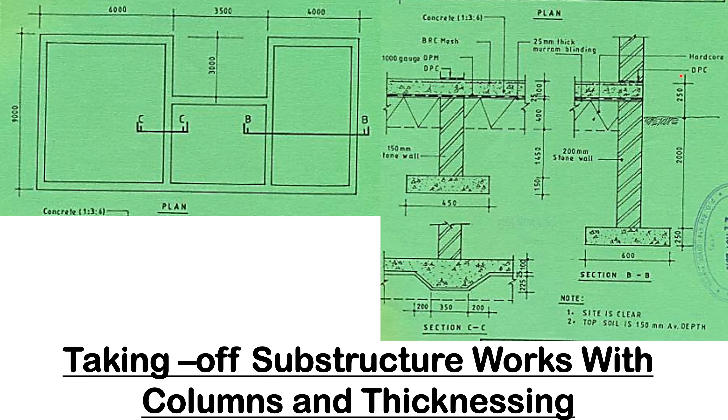So now we shall begin the take off, whereby we shall start with excavating the oversite. Then we shall go to excavating the foundation trenches. We shall lay the concrete in the foundations. We shall go to foundation walling. Then we shall go to hardcore, and here we shall remember that we have the thicknessing. We shall do the murram blinding. Then we have the DPM and anti-termite treatment. Then the formwork and the floor bed.

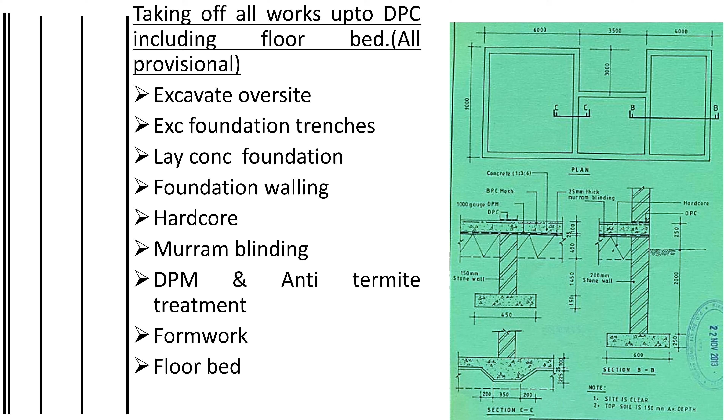So we shall begin with excavating the 150 millimeters depth of topsoil. Remember, you are told that the topsoil is 150 millimeters depth. So excavate away 150 millimeters. We need to measure this site. When we are measuring for site clearance, remember we have to add the foundation spread. The foundation spread is this spread this side.

So if this one was 600, we shall deduct for the wall, which is 200, then it remains with 400. 400 divided by 2, you get 200. So from here to here, we shall add 200 all around the site. That one is for the foundation spread, so that we can add it to site clearance.

So we shall come and analyze the length and the width. The length is 6,000 plus 3,500 plus 4,000, which is 13,500, and the width is 9,000. So if the width is 9,000, we shall add 400. So 9,000 plus 400 shall be 9,400.

Then it is the length and the width, so it shall be 13.9 and 9.4. Then we need to know the level to which we shall reduce. We reduce the level up to where we start to lay the hardcore. So what is the depth from the ground level? How do we calculate that? We shall take the trench, the depth of the trench.

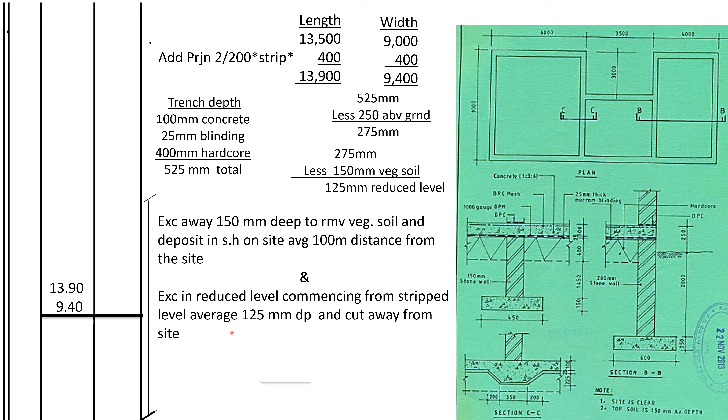Then we have already cleared the site of vegetable soil, which is 150 millimeters. So the remaining amount by which we need to reduce the level is 125 millimeters. So we shall say excavate to reduced level commencing from strip level, average 125 millimeters deep, and cart away from the site. Alright, then we shall go to site.

Remember here we have a void. This one we need to deduct. We have taken this length and width for site clearance. Now we need to deduct for the void. For the void, we shall take this 3,500. Remember, there is a spread coming this way and another spread coming this way from this wall. It spreads this way 200 and this way 200. 200 plus 200 is 400. 3,500 minus 400 is 3,100.

So the length will be 3.1. The width, you can see from outside the wall to outside the wall is 3,000. Assuming the spread will come 200 more, if it comes 200 more, it also needs to go 200 more. So 3,000 minus 200 plus 200 remains just 3,000. So 3.1 and 3, deduct ditto the last two items on void. Alright.

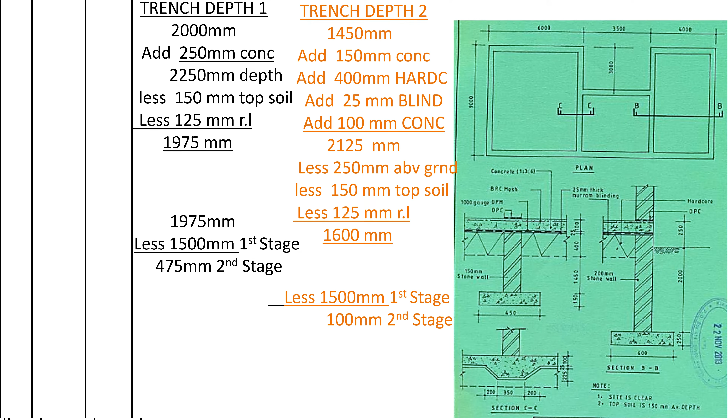Now we shall go to excavating the foundation trenches. We need to book it. We have already found the depth. Now we need the center length. For trench 1, the external trench, we will take the total length. We add 200 and 200 for the spread. It is 13,900 because it was 13,500 plus 400, 200 on both sides. Then the width is 9,000; we add 200 and 200, 9,400. The total perimeter is 46,600.

We also need to add this wall. Remember we did the center line for the recess at the center. The link is on your screen. If you did not watch that video, you can go and watch it so that you know how to calculate the center line for a rectangle with a recess at the center. So we shall add 3,000 times 2, 6,000.

After getting the total external perimeter, we deduct the number of corners times the thickness of the wall. The number of corners is the number of external corners minus the number of internal corners, as we discussed in the previous video. So there are 6 external corners, deduct 2 corners. So 4 corners times the thickness of the trench, 600, is 2,400. So the total center line is 50,200. We book 50.2.

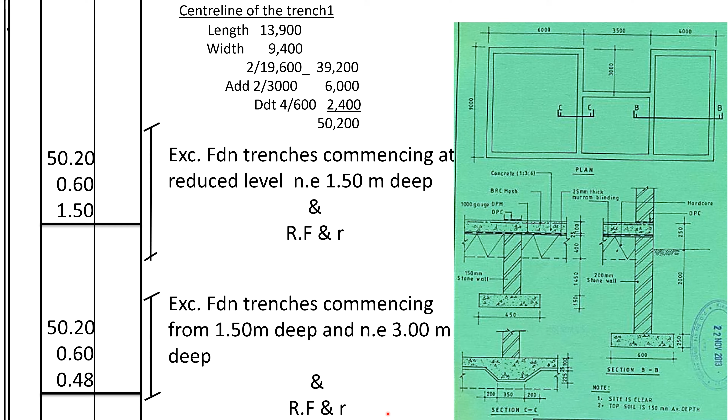The width of the trench is 0.6 and the depth 1.5 for the first stage. Then the second stage: 50.2, 0.6, 0.48. The description is excavate foundation trenches commencing at reduced level not exceeding 1.5 meters deep and refill and ram. The next stage is excavate foundation trenches commencing from 1.5 meters deep and not exceeding 3 meters deep and refill and ram. This volume of soil you add to refill and ram. We need to do a video on refill and ram together with cart away to explain the difference.

Alright, center line for trench 2, this trench here. What is its length? We take the total length here, 9,000, and deduct 3,000 up to here. We remain with 6,000. When we excavate this trench, we have the spread on this side, 200, and this side, 200. But 6,000 is from outside the wall to outside the wall. So we deduct wall and spread, 400, and wall and spread, another 400. 400 times 2 is 800. The difference is 5,200.

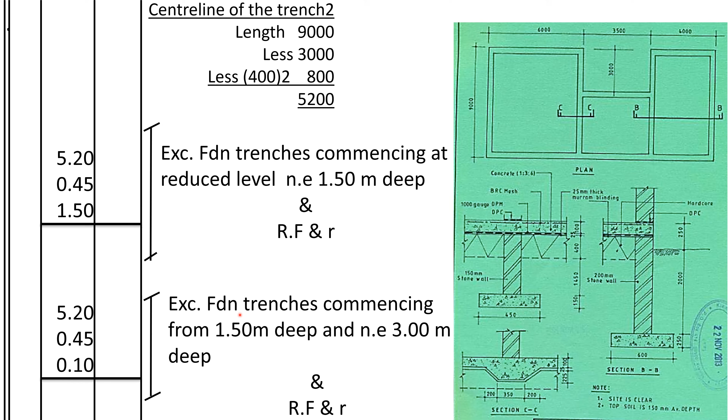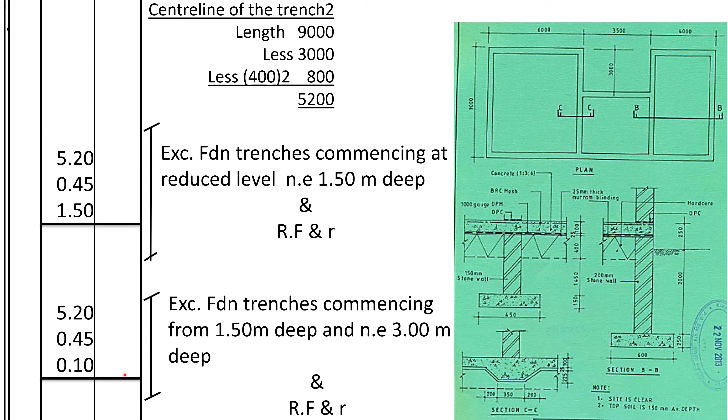So excavating the trench, it shall be 5.2 times the trench thickness of 0.45, as you can see here. Then the depth of the first stage is 1.5. Excavate foundation trenches commencing at reduced level not exceeding 1.5 meters deep and refill and ram. That volume of soil you add to refill and ram. The next stage is excavate foundation trenches commencing from 1.5 meters deep and not exceeding 3 meters deep. You take the center line, the width of the trench, and the depth for that stage, and add to refill and ram.

Alright, so we go to planking and strutting the excavation trenches. We need to support them. This one we usually write item together with keeping the trenches free of water. We write item because in the BQ we shall allocate a provisional sum which can change when we get to site. So we need to go to site, and so we take off as item.

Now we are on mass concrete. This mass concrete here and mass concrete here. How do we take it off? We shall take the center line of the trench multiplied by the width of the trench and the thickness of this concrete. For the external trench, we say mass concrete ratio 1:3:6 in foundation trench for external wall, and this volume of concrete has replaced the soil. So we shall deduct from RFR and add to cart away, the soil that will be taken away from the site.

Then this concrete for the internal wall: the length of the wall is 5.2, the width of the trench is 0.45, and the depth of this concrete is 0.15. So mass concrete ratio 1:3:6 in foundation trench for inner wall, and that volume of concrete deduct from RFR and add to cart away.

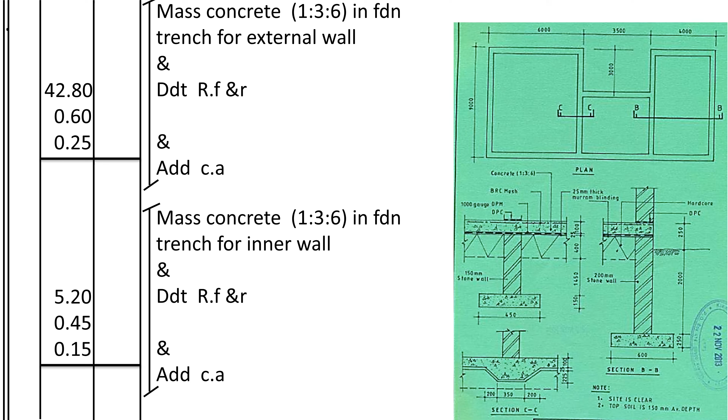Then we go to measuring the height of foundation wall. We shall start with this external wall. The total here is 2000. Alright, 2000 together with 250 above the ground. From here up to here is 2250. Then if we deduct the oversite concrete and the blinding, we shall remain with the foundation wall. So 2250, we deduct 100 for the concrete and 25 for the blinding. We remain with 2125.

So the center line of the trench, which was 42, will be the center line for the wall, because if this trench is 600 and the wall is 200, 600 minus 200 is 400. If we divide by 2, we get 200, 200, meaning the center of the wall is the center of the trench. What about this one? 450 minus 150 is 300. If we divide by 2, 150, meaning the center line for the wall is the center line for this trench. So we shall still take the center line for the trench, then multiply by the height of the wall, 2.13; that is 200 millimeters thick stone external walling in cement sand, ratio 1:3 mortar joints.

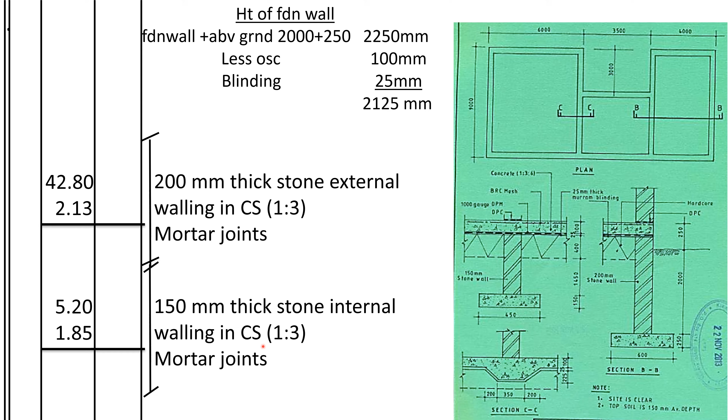Then for this internal wall here, it shall be the length of the wall, which is 5.2. Then the height of the wall, we shall just take 1450 plus 400, 1.85; 150 millimeters thick stone internal walling in cement sand, ratio 1:3 mortar joints.

Alright, so then we shall go to the height of foundation wall. How do we calculate the height of that wall? If we get the height of these walls, just as we have done previously, we can know the volume of soil we need to deduct from refill and ram and add to cart away, because that volume of soil has already been replaced by the wall. So we shall find the volume of the walls. We take the center line of the trench, which is the center line of the wall, multiply by the thickness of the wall, 0.2, then the depth of the wall for the external wall. Then we take this volume and deduct it from RFR and add to cart away.

RFR is the soil that we shall use to refill and ram. You remember we have two heaps, one for RFR, another for cart away. So that soil, we deduct it from RFR because it has been replaced by the wall, and add it to cart away. Then for the internal wall, we take the length of the wall, the thickness of the wall, and the depth of the wall. That volume replaced by the wall, we deduct ditto for internal wall. We do as above. We deduct from RFR and add to cart away.

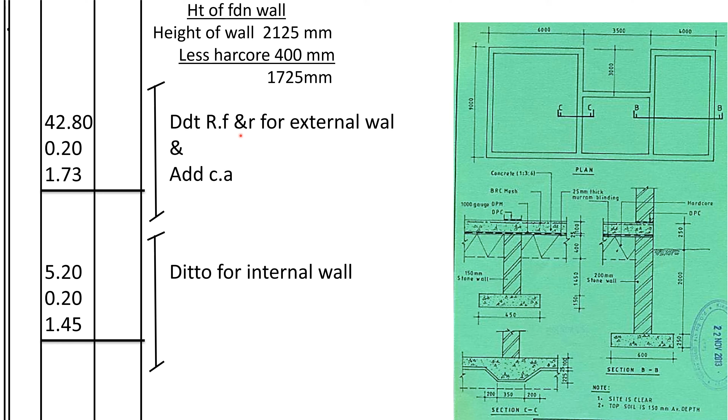Now we shall take off the hardcore. If you can see on the diagram, between the external walls there is hardcore. Hardcore is always placed inside the rooms where there are no walls. Inside the rooms is where we do the hardcore. So there are three ways that you can do the hardcore.

You can take the length and the width of this rectangle, take the length and width of this rectangle, and also take the length and width of this rectangle, then add the thickening, which can bring you so many errors. So the easiest way to do this, we shall take the total area inside the external walls, then we shall deduct the area for the void together with the walls, then we shall deduct the place with the thickening.

If you note well, in the thickening part we reduce the hardcore, then we increase the concrete. I hope that is very clear. So here in the hardcore, you know hardcore could be up to here, but now it was reduced. Then we increase the concrete. So that is the tricky part about thickening.

So when you are finding the area for the hardcore, we shall take the internal dimensions. For the length, we said that the external is 6,000 plus 3,500 plus 4,000. So the total is 13,500. We deduct 400 for this wall and this wall. So it shall be 13.10. Alright, the total external width is 9,000. We deduct this wall and this wall, we get 8.6.

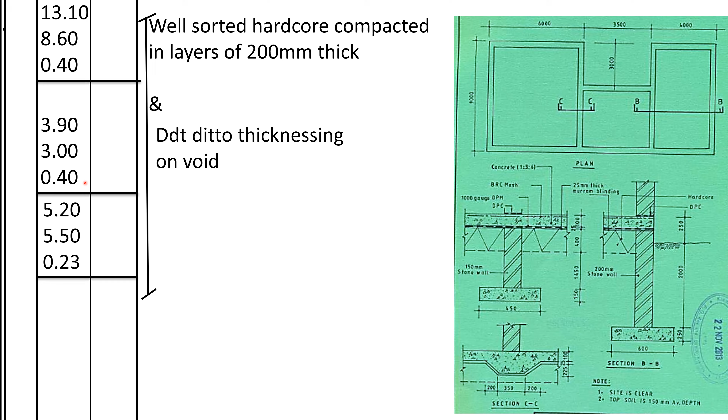Then the width we have here, the internal, is from here to here. So here we have 200 plus 3,000 minus 200, because we were taking the internal dimensions, so it shall remain 3 meters. Then the depth of the hardcore is 0.4 on the void that we are deducting. Now there is this thickening part. How do we calculate the volume of the hardcore that was reduced? Here I will use my pen.

We will always extend a straight line like this, then we extend a straight line like this. You see this triangle here is the same as this triangle over here, because the hypotenuse must be equal, the base is 200, and the height is the same. So if we take the volume of this part here, we have two triangles. This is the triangle that is existing, and this is the imaginary triangle which was replaced by this other triangle here. So it forms a square. The base of the square is 200 here and 200 here. Let me show you using my pointer. Here it's 200, then here it's 200.

So if we are able to find the area of this square, we multiply by the length of the wall. It's the same as if we draw a straight line this way up to here. If we find the area of this full rectangle from here this way, it's the same as this one from here, with the hypotenuse this way. I hope it is clear. I think I'll do another video to show you how that one is calculated.

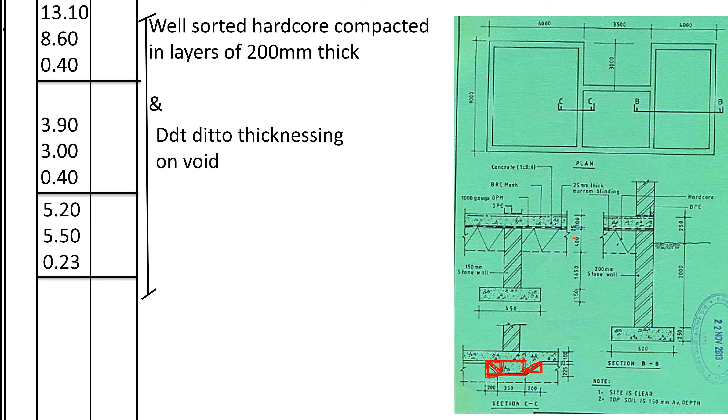Alright, so after the hardcore, we shall now go to the murram blinding. The murram blinding, if you look at the section, goes above the wall. So you'll take the external dimensions of the wall. Then it goes down on the thickening part. You need to note that when it gets here, the murram was to come straight this way, and we have already measured the external dimensions, this straight line, but the murram blinding is coming this way. So we shall take this length, this one plus this one plus this one, then we deduct this one.

Alright, so this is the length, the external length and the external width. Then 301.04 is hypotenuse for the triangle, and 301.04 hypotenuse for this triangle. That's why we are multiplying by 2. Then we add this 350 down here.

Then we shall subtract this total length here, which is 200 plus 350 plus 200, which is 750. So the total length shall be 13,702.08. That's why we write here 13.70. The width shall remain 9.0. Then we shall deduct for the void. So it is this 3500 and this one is 3000. I hope that is clear.

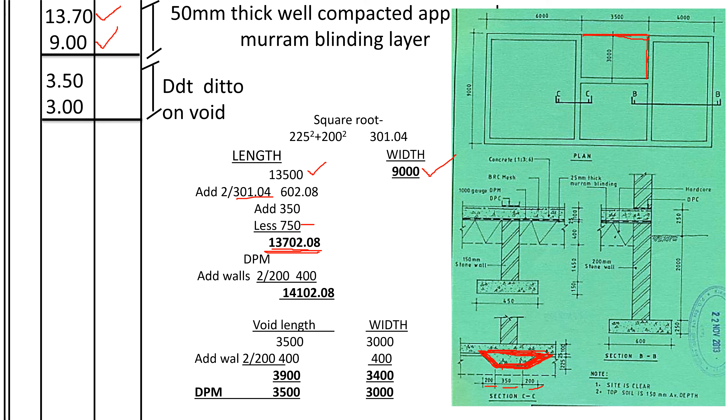Then we shall go. Now we shall take off the DPM. The DPM is just like the murram blinding because it will come this way. So the same dimensions for the length, for the width, then we deduct for the length and width of the void. Alright. So we shall go to vibrated reinforced concrete in 100 millimeters thick layer, oversite concrete.

So the oversite concrete, we measure the external dimensions of the length and the width. The length is 13.5, the width is 9. And the same area we shall have the BRC mesh, this one that you can see here, number 66 to BS 4483, including cutting, bedding, tying wire and distance blocks. They are all assumed to be counted in.

Then when we measure the area of the concrete, remember concrete is measured in terms of area. There is this concrete that has been thickened here. So we shall calculate the area of this concrete. Then this depth we shall write it in the description column. Alright, because it's measured in area. So how do we calculate the area? Here is where we extend.

You see this is a triangle and this is a triangle. If you combine the two triangles, they'll make a square. And if you just draw a straight line this way, you form a rectangle. This rectangle here will represent the area of all the concrete from here. So the base of the rectangle shall be 350 plus 200. Then the height is 225. Then we shall multiply by the length of the wall.

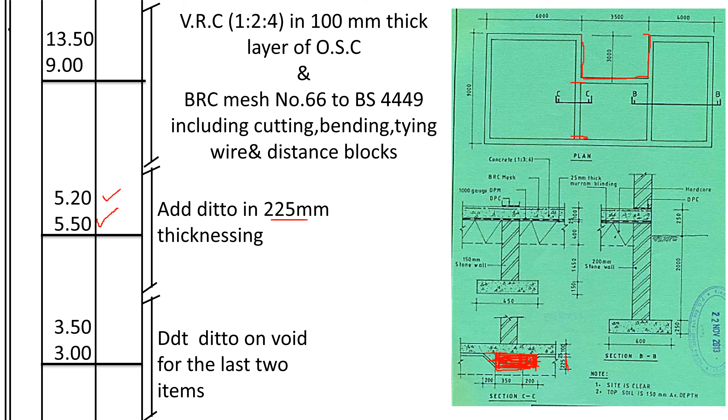So we shall start with the length of the wall from here up to here, 5.2. Alright. Then we multiply by the thickness of this rectangle, 350 plus 200, 550. So it's 0.55. Then you say add in 225 millimeters thickening because of this height here. Alright, then we shall deduct the concrete for the void. Here we will not have any concrete, we shall deduct it. So the length is 3.5 and the width is 3 meters.

Okay, now we shall go to formwork to the vertical edges of the oversight. So for the length we have this one, this one, this one. It makes the total length 13500 together with all this. For the width we have this width and this width. That's why I'm multiplying by 2. Then we have this 3000 and 3000. That's why we are multiplying by 2.

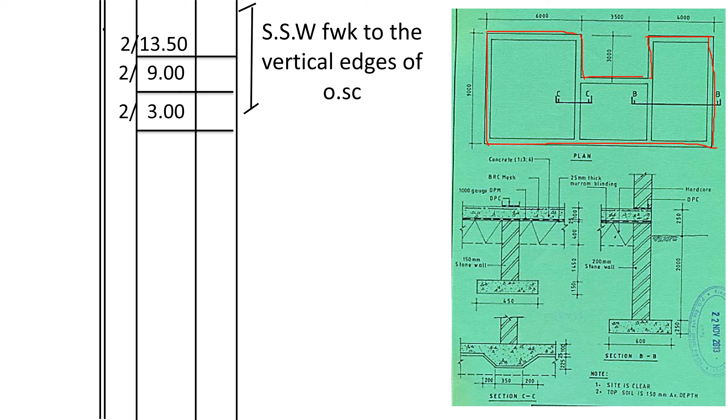Alright, so we shall complete with center line of reinstatement. This is the soil that we shall return all around the house where there was the foundation spread. And we usually calculate the center line of reinstatement. For the center line of reinstatement, we shall take the external dimensions including the spread. Then we deduct number of corners times the thickness of the spread.

So the external dimensions were 13500 and 9000. So we add the spread both sides, 200, 200, we get 13900 and 9400. Then after we get the total, we shall add 2 times 3000 for here and here, so 6000.